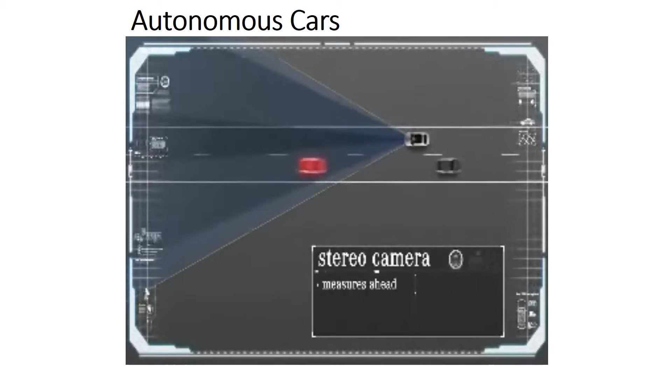Let us now take a closer look at the sensor setup of our current research vehicles. From the standard vehicle, we took the stereo camera, which accurately measures objects in front, such as stationary obstacles, other vehicles, or pedestrians, up to a distance of about 50 meters. It also determines the course of the lane.

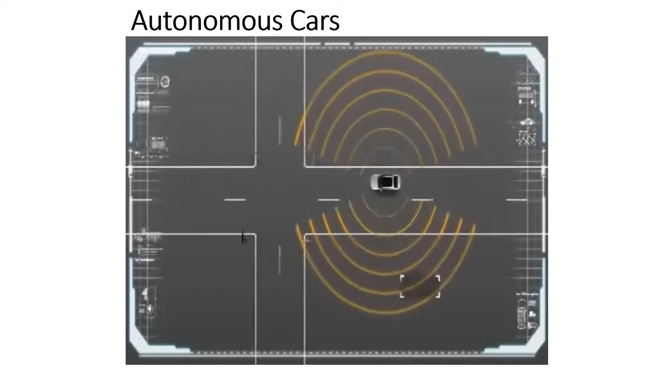A long-range radar can look even farther into the distance. This car has two more of these radars installed on each side to look at traffic from the right or left, at junctions and intersections.

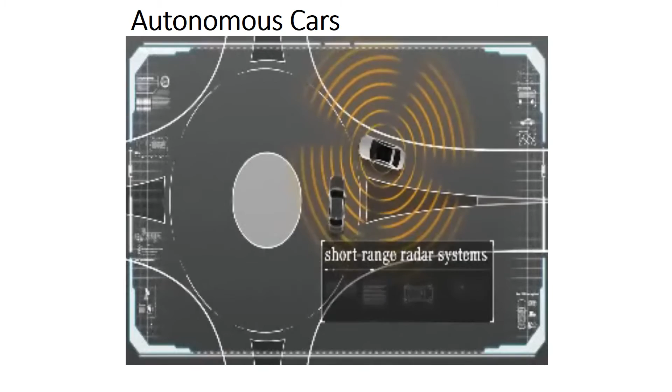There are also 4 short-range radars which check the immediate vehicle surroundings, which is useful at roundabouts and to safely pass cyclists. One camera looks to the front and checks traffic lights.

Another camera covers the back and helps us to improve localizing the vehicle together with the GPS system.

The vehicle is assisted by digital maps, which are more precise and more detailed than the conventional navigation maps we are used to. They contain, for example, the position of stop lines or traffic lights, advanced information which is later validated with the onboard sensor system.

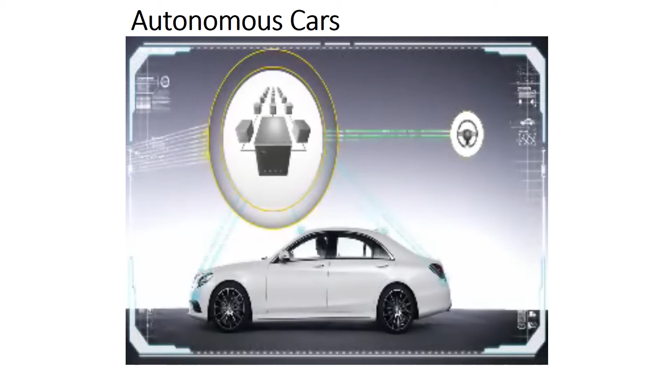In our cars, an intelligent drive controller analyzes and assesses data in real time and determines which driving maneuver best fits the situation. This central decision unit is not linked to any systems outside of the vehicle and is therefore protected from any undesired external access.

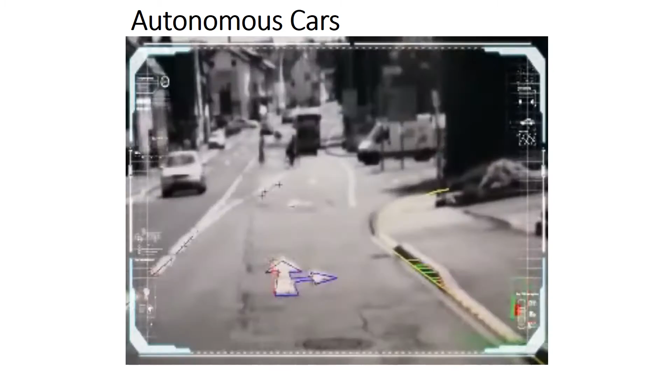We learned a lot in retracing the original long-distance drive by Bertha Benz some 125 years ago with a self-driving car. And we discovered how we can transfer our systems from cars to trucks. It is now time for us to introduce our autonomous vehicles to people on streets on other continents.

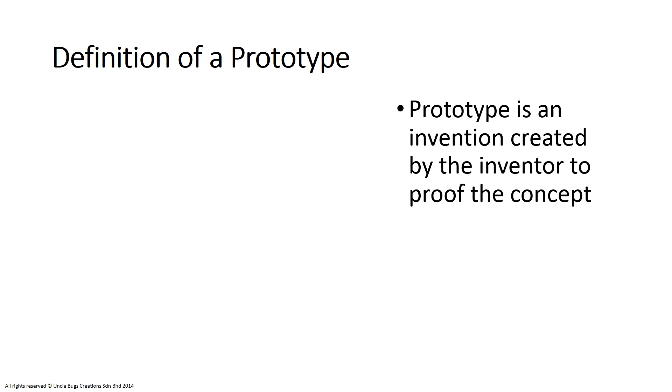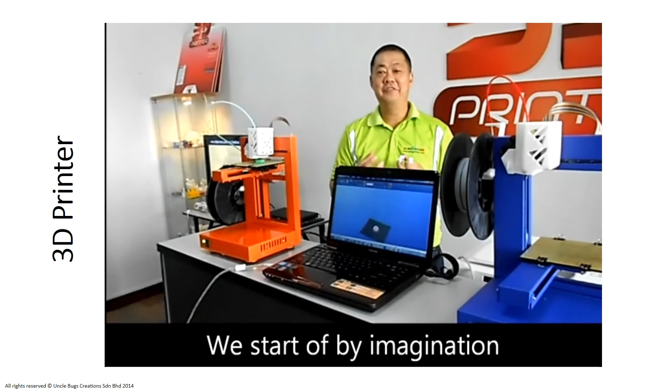I'm Uncle Bugs and I'm an inventor. As an inventor, we have a lot of imaginations, but imaginations are all in our head, so we cannot feel, we cannot touch. So that's why I'd like to introduce to you today a 3D printer. This is a 3D printer.

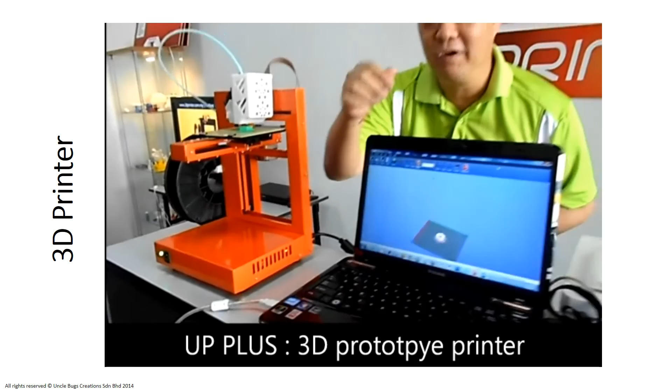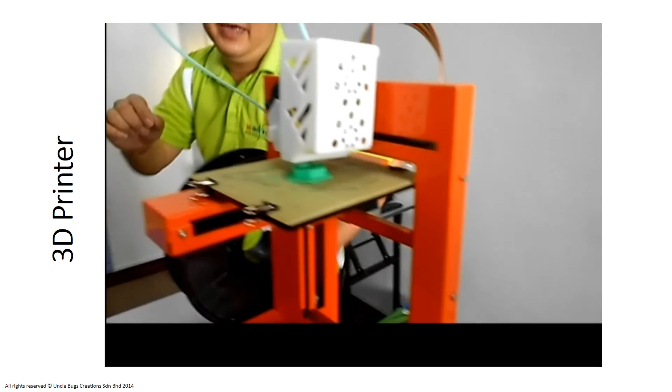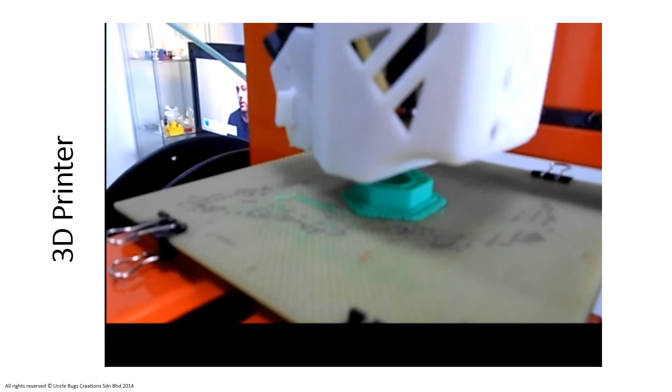To begin, first you got to draw your object in a computer like this. Can you see it? And when it's done, you press send. You send it to this printer, and bit by bit, the printer will melt the plastic to make layer by layer until you get the things you want. Like for example this. See, you get a nut, then you got a screw, and you get exactly what you want. And this is a wonderful machine.

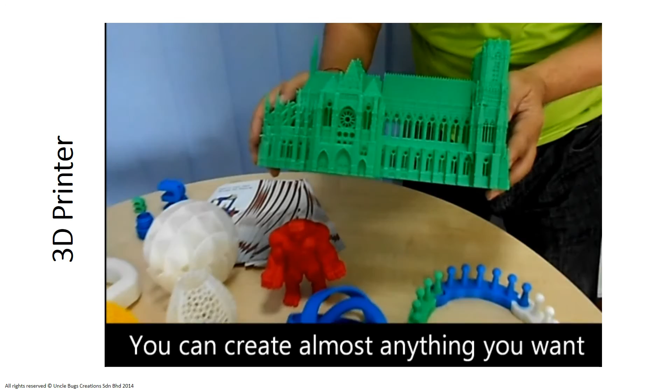You can make a lot of things. Come, let me show you. Over here, you can see, you can even make the entire castle, you know? Entire house with so much details. You can also make an incredible Hulk.

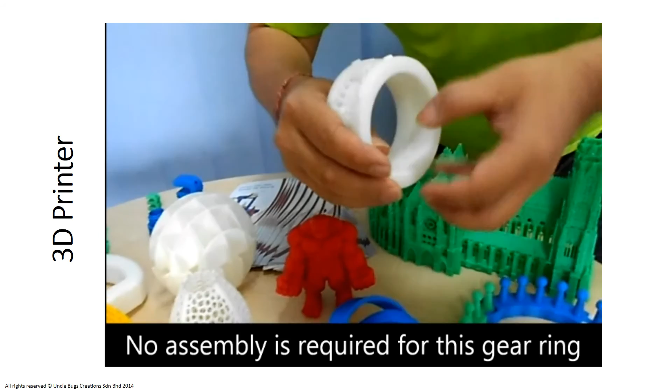You can even make this ring. Can you see? Wow. You can make things like that. Can you see?

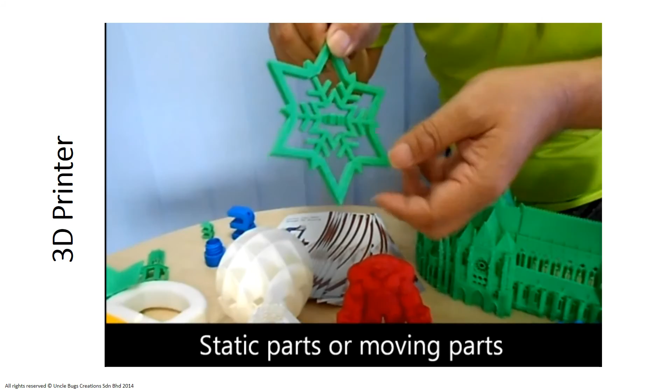And plenty more things.

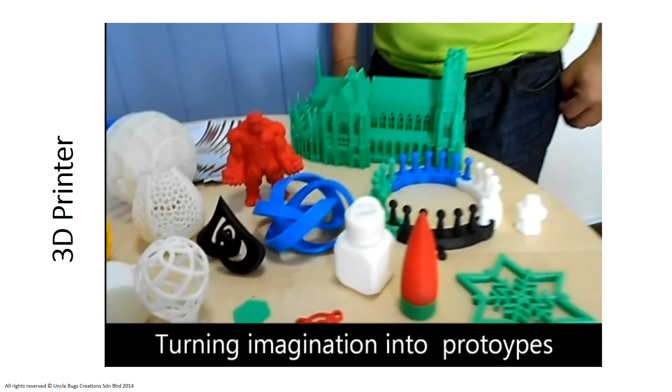So it's always good to have something you can hold in your hand, you can play with it. And this machine does it for you. Okay, thank you.